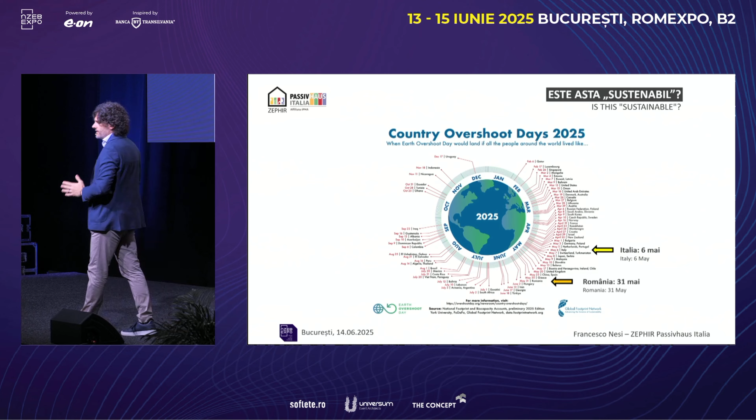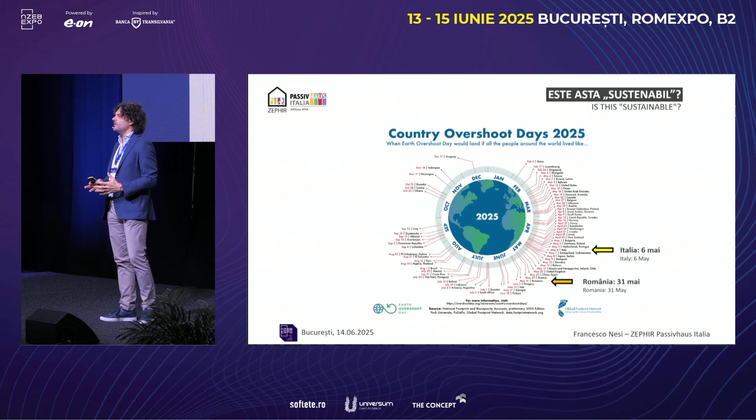As you can see here, in Italy, in May we already consume all the resources available for us. So from now, we are already consuming more than the resources available. Last year, 2024, the 20th of July was the country overshoot day for Romania. What's happened since last year to this year? As you can see, Romania is already at the 31st of May. So you were first at the 20th of July last year, and now you're progressively consuming more and more, approaching Italy even. We are still consuming too much, but that's why it's so important now to invest in energy efficiency.

As you can see, what we did in the world—we are based in Italy, as Dragos introduced before—but we've been working everywhere for 18 years. Here are some of the projects we've been following in several parts of the world, in very challenging climates, very warm, hot and humid, or very cold, like now in Montreal.

We also have been to Cameroon to explore the possibility of approaching with a low energy efficiency approach—not full Passivhaus because the market isn't ready yet, but using Passivhaus tools to approach the Cameroonian economy.

As well as in Bhutan, a very small country, the happiest in the world, because they measure their happiness not by GDP but by the gross national happiness index. It's something different from what we're used to, but they are also using the Passivhaus approach to increase the comfort of their lives and homes, which are very leaky indeed.

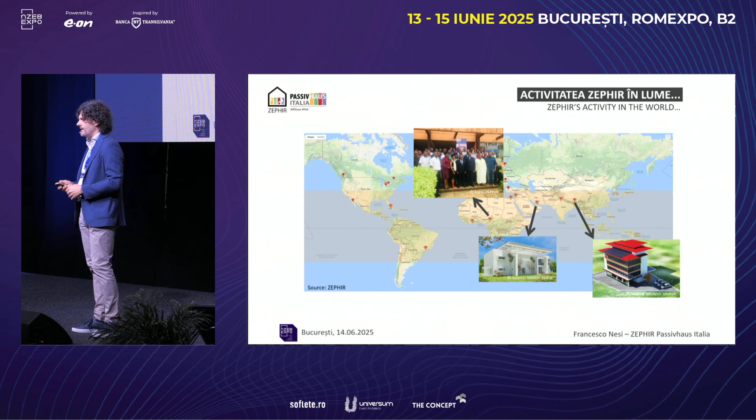In Dubai, we went to give consultancy for the very first Passivhaus in the desert, as well as in India, New Delhi—this was the National Railway Museum—and in Toronto, for the retrofit of a skyscraper according to the EnerPHit standard.

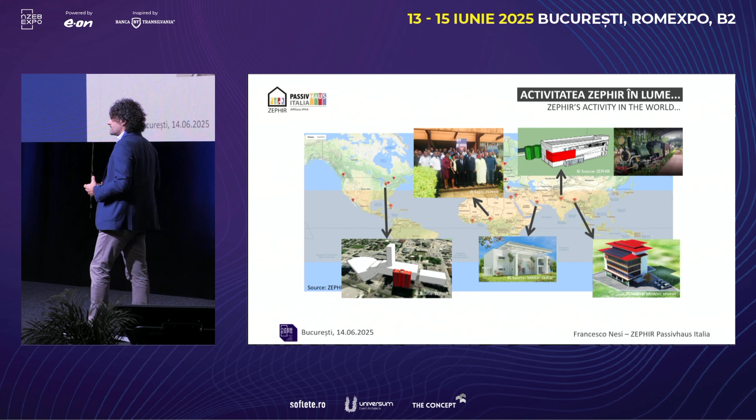So as you can see, Passivhaus adapts to every kind of climate, and we are happy to try to approach most countries, as well as in Italy. Since our foundation in 2011, Passivhaus has been rapidly growing, and we are trying to bring Passivhaus also toward the south.

It looks like people in the south don't realize how much they're paying for air conditioning and cooling, but only people who pay energy bills for heating come first. I don't understand why, but that's the reality. So people from the south are slower, they wait, but in the meantime they pay the bills.

As soon as they realize they're paying too much—our energy bills are so high, in Italy electricity costs range around 30 euro cents per kilowatt hour, which is pretty high—that's why people start realizing maybe we should invest in sustainability, insulation and airtightness and so on. The first question we're asked is: yes, but how much will I pay for it? Will I pay it back or not?

To answer this question in a professional way, we implemented an economic analysis into PHPP, the Passivhaus software. Every time we approach a new project, either for a new construction or a retrofit, we always start from a viability analysis, an economic feasibility analysis, to see how much more they are going to pay and whether these extra costs pay back through energy savings already in the first year.

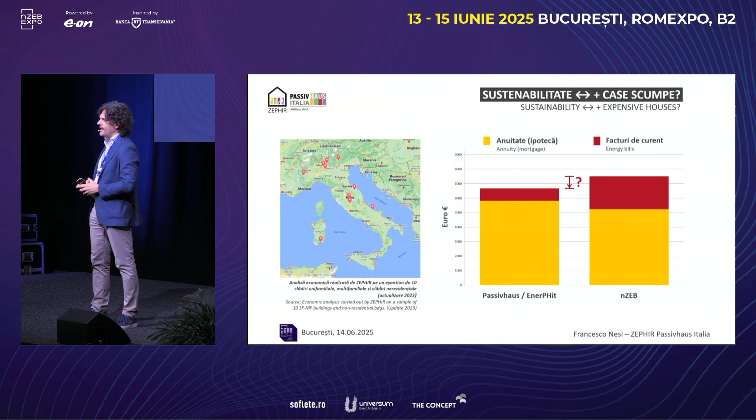We've carried out this research on some of our projects, and as you can see, Passivhaus is slightly more expensive than the alternative in investment cost, but this decreases the energy bills to such an extent that already in the first year, Passivhaus pays off.

And that's a very important message for the client, because if we do some economic analysis and the Passivhaus pays back, say, in 10 years, the client will never sign the contract, because he says maybe in 10 years I've sold the house, I've separated from my wife, whatever may happen. But if we use building physics—I'm a building physicist—connected to economics, and try to reach the point where already in the first year the Passivhaus pays off, the client will always sign the contract, because it pays back immediately. That's the important message.

So we always have this cost-effective, cost-optimal analysis in mind.

In Italy, in 2023, a couple of years ago, Banca d'Italia, the Italian bank, issued a study demonstrating that investing in real estate, in private investment, up to Class A level—we all know the EPC energy audits are often silly, claiming we're in Class A when indeed we are not even in Class C—but investing really in a very good, low-energy, efficient building like a Passivhaus and a real nZEB will really pay back. In the market, the property increases its value, even plus 25% more, which is very important, besides increasing comfort and having very low energy bills.

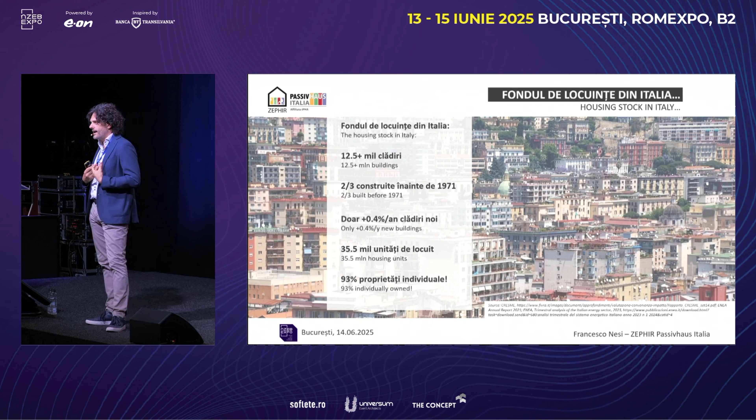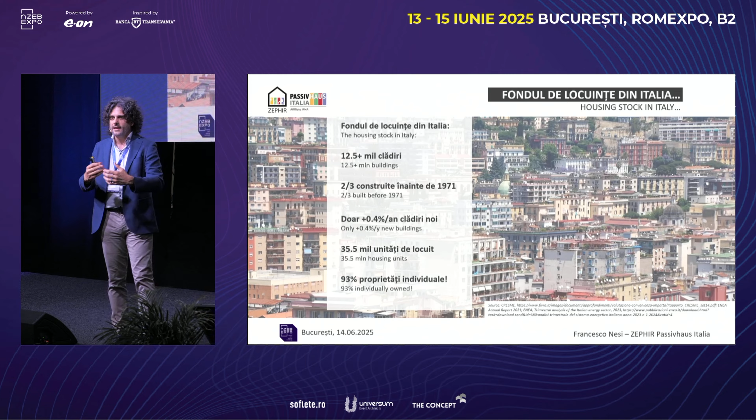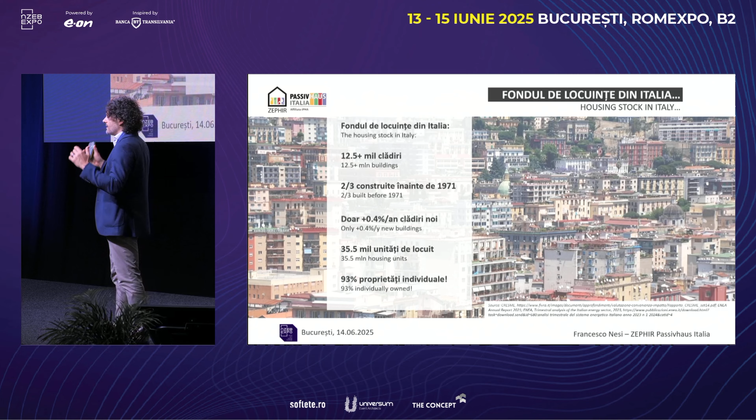As you can see, we have similar problems as you have, namely individual property. So I have a house, you have a house, he has a house, but it's not a house, it's an apartment inside a huge building block. And if a multifamily building needs all tenants to agree on the interventions and retrofits, this will never be possible, because of course they don't agree with each other on an overall, specific and consistent retrofit intervention.

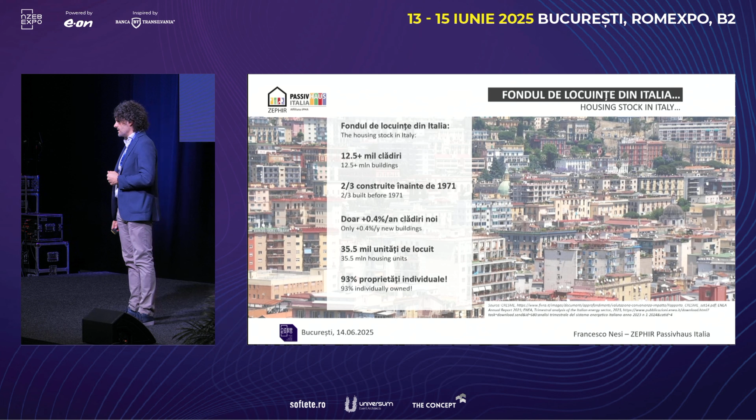That's the problem. We have even 35 million units to be retrofitted, 93% of them individually owned. And 75% of the EPC energy certificates issued since 2020 are not referred to the highest level.

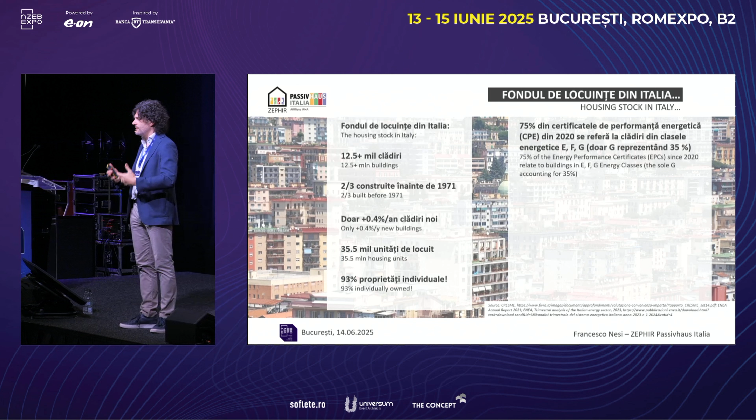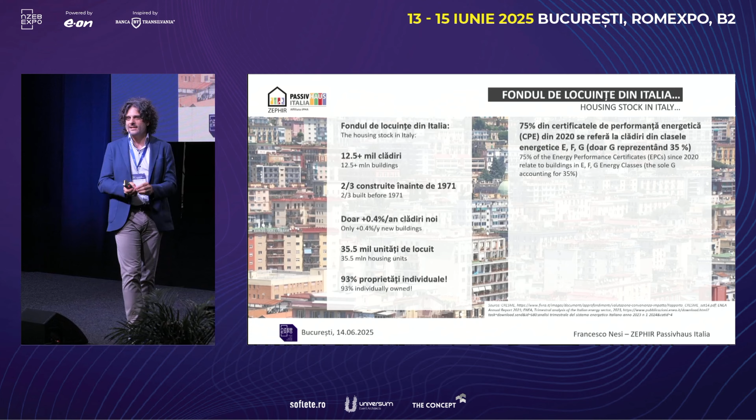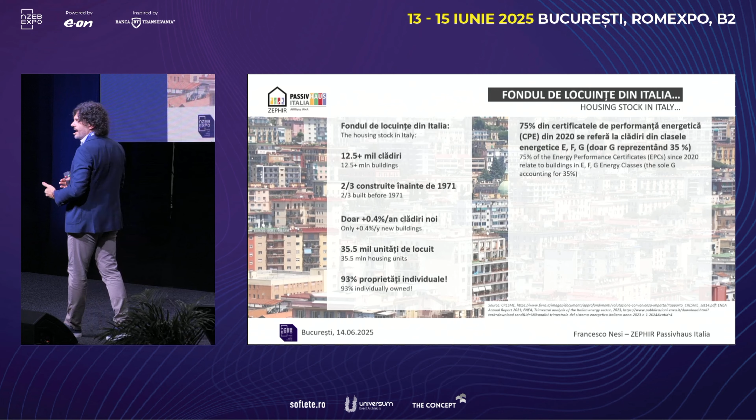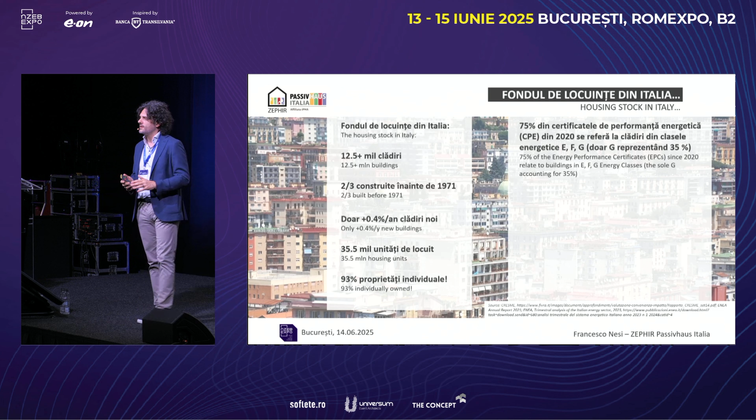Even though maybe you've heard about this, in Italy we had a very nice retrofit supporting scheme by the state after the pandemic called Super Bonus. They gave back 110% of the investment, so for free—everyone went there. But as you can see, they were not pushing or pursuing the A classes or something like this, the G, F, E, whatever, the lowest ever. So we trashed away a huge opportunity to retrofit our buildings to the best possible level, going instead for a suboptimal level.

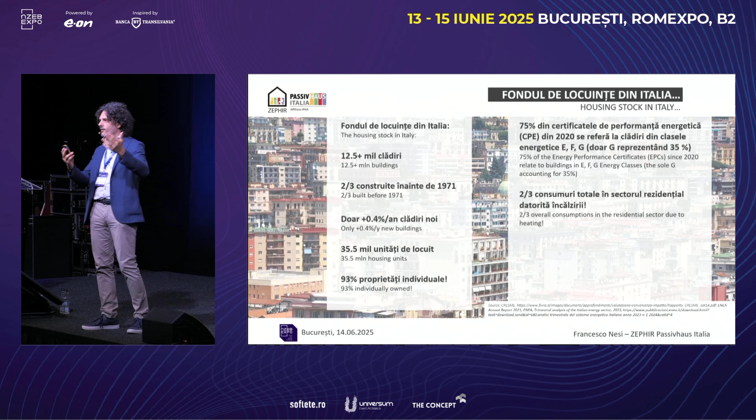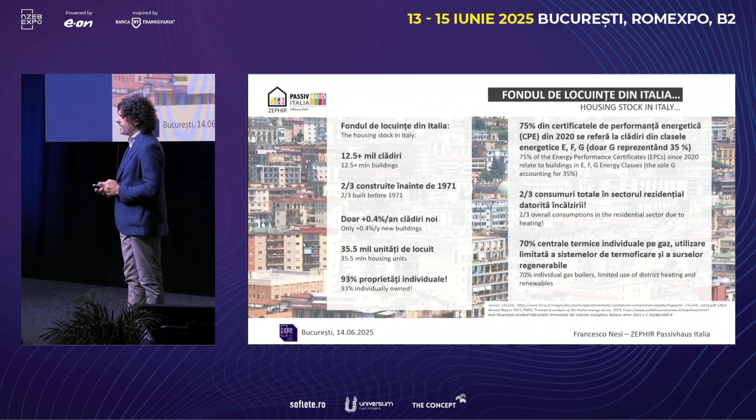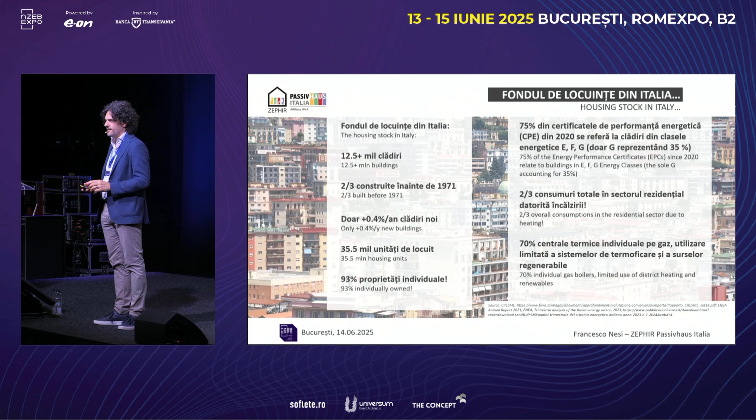Two-thirds of the energy consumption in Italy is due to heating, and we're in Italy, not sitting in Poland or Siberia, yet still two-thirds is trashed away through heating our buildings. 70% of our houses are heated through gas boiler, with very few, for instance, on district heating, teleriscaldamento, something like this.

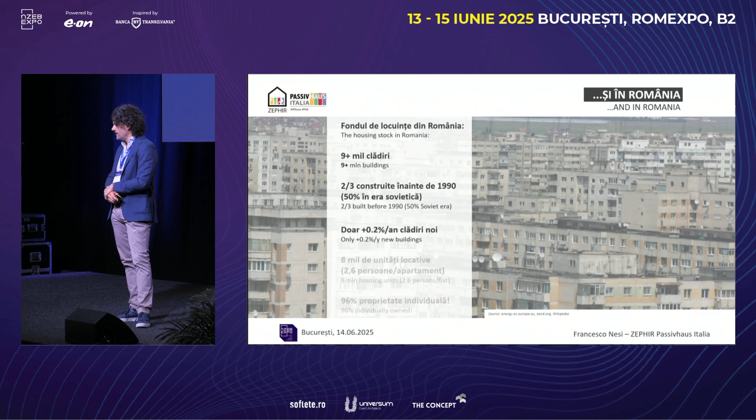Let's see the situation in Romania. You have 9 million buildings, more or less—this data is from the internet—two-thirds built before 1990, half of them built in the Soviet era, the blockery and so on. Only 0.2% per year are newly built, and the rest are, as you can see here, a very similar situation: 96% of the apartments are individually owned. So we should definitely invest in retrofits.

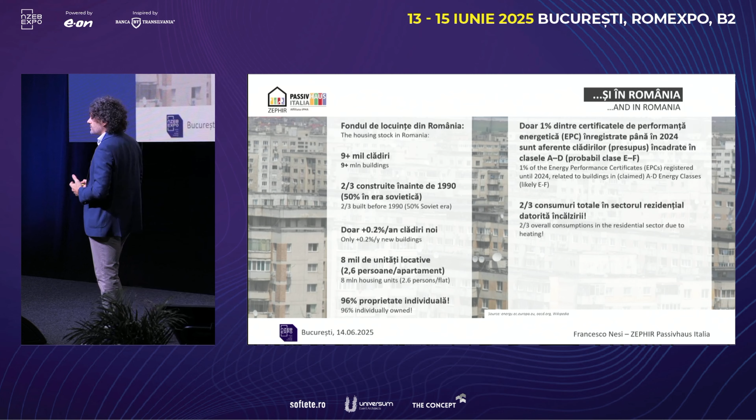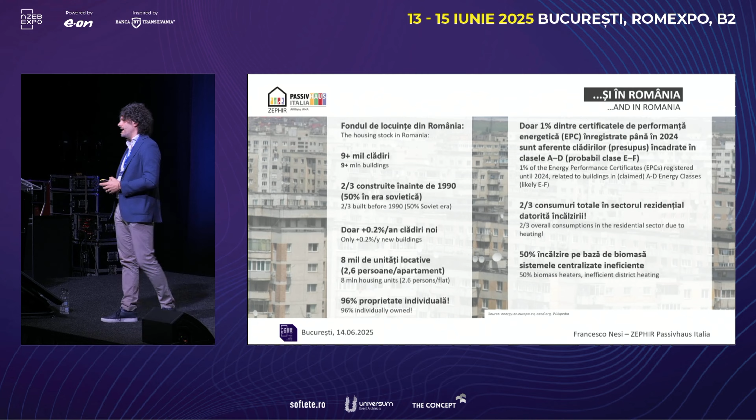How many EPC energy certificates have been registered in past years? Just 1%, claiming they are all in classes A to D, the maximum—but in fact maybe they are even E or F. So that's the situation, we should definitely do something better. Two-thirds of consumption here as well is due to heating, and 50% is basically biomass heaters, plus, especially in big cities, district heating, but a very inefficient one, losing a lot of energy.

So Passivhaus might be the answer to address this for new builds, and EnerPHit for renovations. EnerPHit can be of two kinds: EnerPHit standard, a normal renovation, or EnerPHit by components, where I work component by component—putting insulation on the walls, insulating ceilings, getting better windows, and so on. We can put all of them in order to increase comfort and reduce bills.

Then we have a step-by-step approach. This means I don't have the whole money for the overall investment, but I can plan a retrofit over the next years. Step-by-step I put some money into the first investment, like insulating a wall. I save money while increasing comfort, then invest in the next step—maybe replacing windows, increasing air tightness, and installing a ventilation system. Then stop for a while, and so on. That's also a very nice approach.

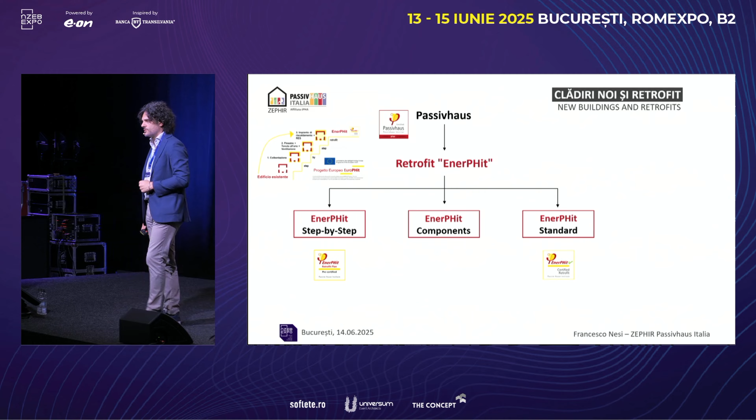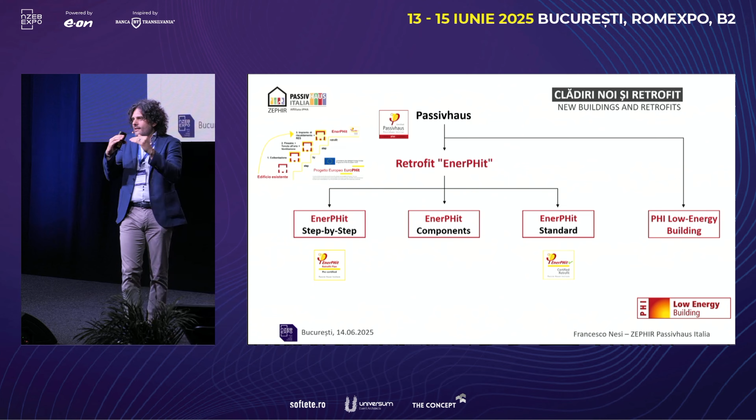If we don't manage to get all the way there, we could also use the PHI low energy building standard—a somewhat lower level, but still with the same level of comfort. This saves maybe not 8 to 10 times the heating demand compared to the building stock, but maybe 3 or 4 times, which is still a very good approach, also usable in a step-by-step way.

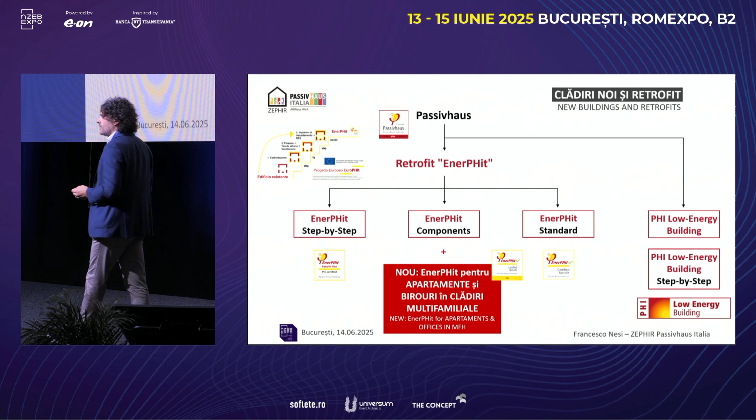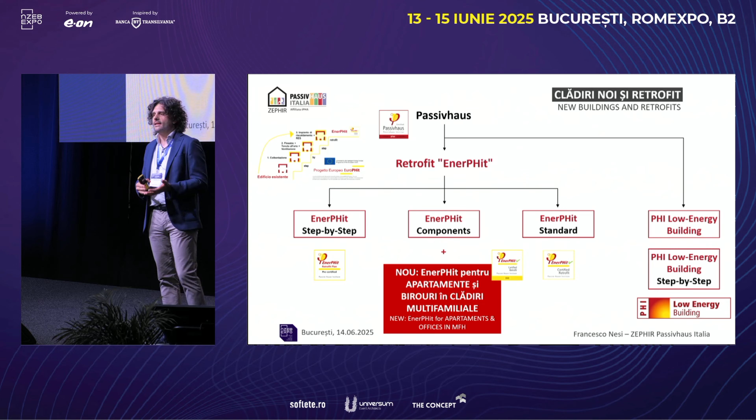Last year we presented the very first certification in the world for the retrofit of apartments, developed very closely with PHI, which we call EnerPHit Unit. Unit stands for a dwelling unit inside a multifamily building, which could be residential or an office, for instance. We did this for the very first building apartment, in Bergamo.

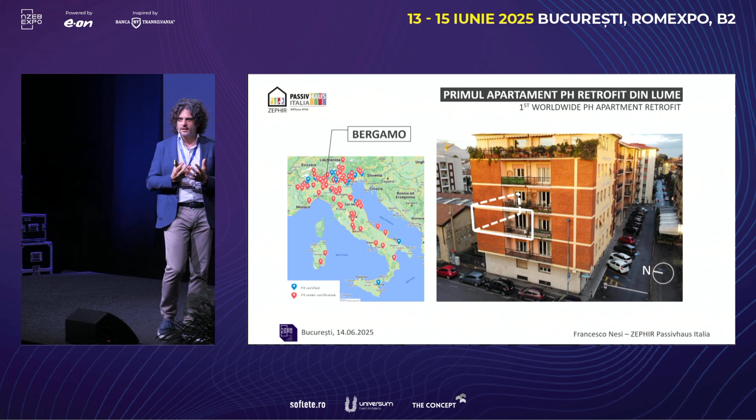It's north-facing, not ideal, but we worked with what we had. We had problems with external scaffolding, so we had to do interior insulation instead—very tricky, but we managed it.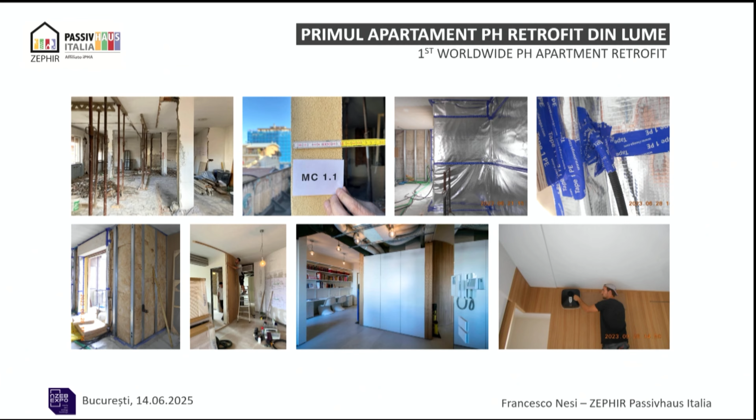Construction was about to begin. I won't go too much into detail—you can see last year's YouTube video where I presented this properly—but you can recognize it. We had a double wall with bricks and air in the intermediate layer, so we just removed the internal wall layer, creating space for insulation. Of course the concrete pillars remain, and we had to wrap them with insulation to try to solve the thermal bridges there. So it can be doable.

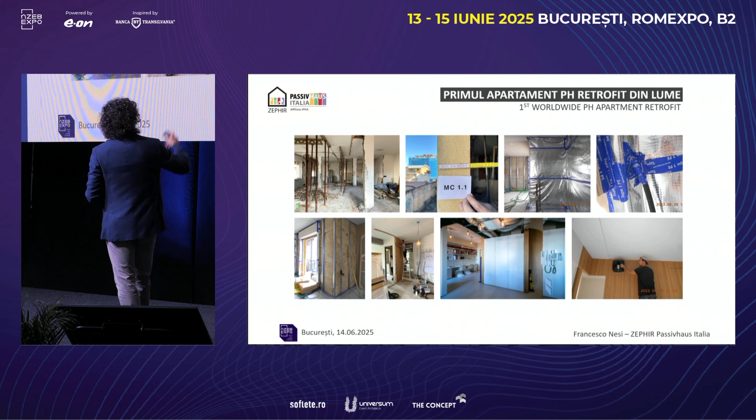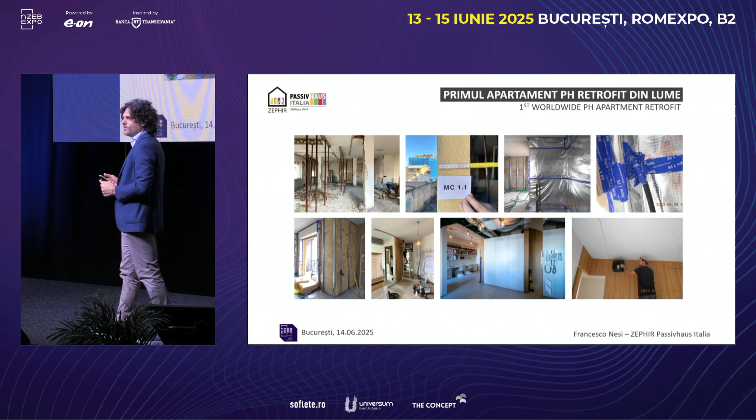Pay attention that the tradespersons involved in this renovation were not skilled, so we had to train them on site—how to put a good insulation layer, a good airtight layer, everything sealed properly, and so on, in order to reach the stringent requirements for the EnerPHit Unit certification.

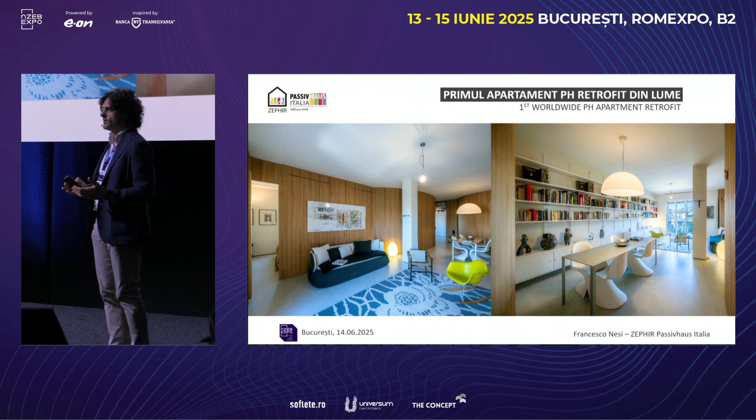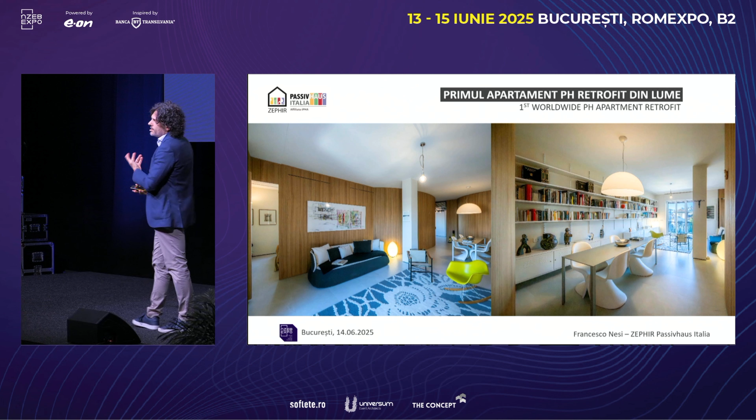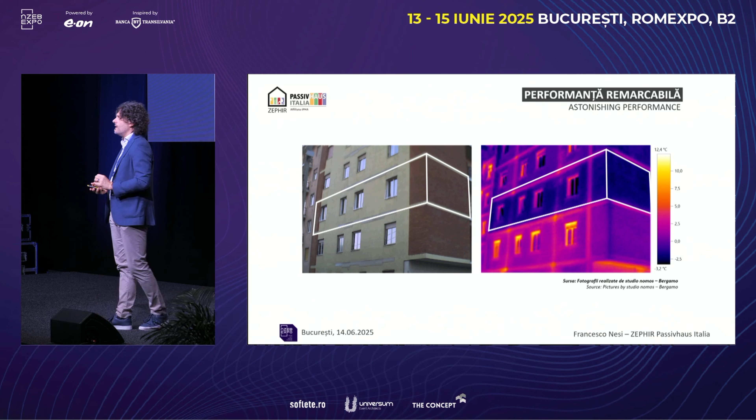Very happy about this—this is the final result, also very nice looking from the architectural point of view. Some people complain that Passivhaus only produces ugly buildings and ugly renovations, but as you can see, the owner, who is an architect, did a very good job here. This can also be seen from outside through thermographic imaging, where you can really notice the difference between the adjacent dwelling units that haven't been retrofitted.

We are also monitoring everything—energy, temperature, humidity, and also energy bills, which still correspond to less than 2 euros a day, sort of a cappuccino cup a day in Italy. That's more or less what we pay for a Passivhaus renovation. In terms of investment costs, one could guess this would have cost a lot, but that's not true—the investment costs have been kept comparable to a normal retrofit, which in Italy is around 1600 to 1700 euros per square meter. So the same amount, but the guy got a Passivhaus apartment.

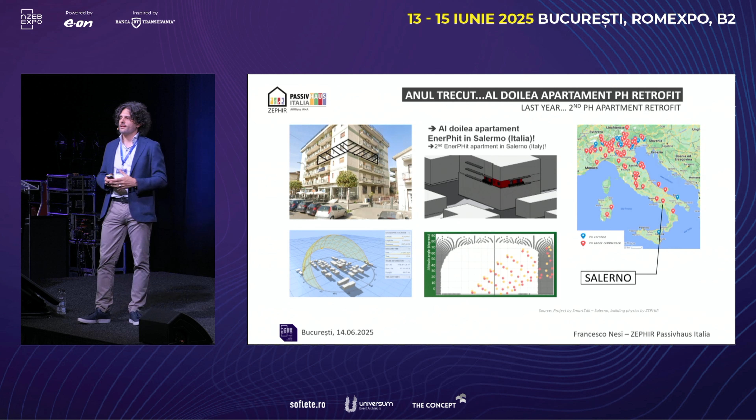Now we come to the second Passivhaus apartment, this time located in Salerno, in the southern part of Italy. You can really see that the interventions are pretty similar, just with different thicknesses, or different thermal resistance. So it's even more easily achievable there.

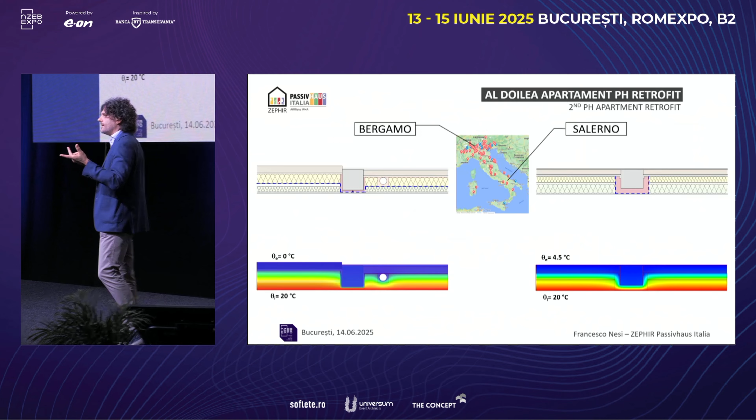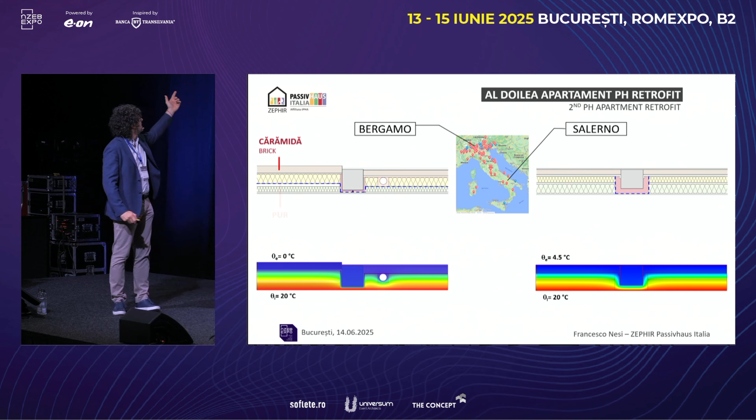This is just a comparison between what we did in Bergamo and what we're doing in Salerno. Here we have external brick, and we used polyurethane from the inside to minimize the space while achieving very high thermal resistance, plus a mineral wool for the electric pipes and ducts and everything like that.

As you can see, in correspondence to the concrete pillar, we had to use VIP panels, vacuum insulation panels, which with a thickness of 1 centimeter is equivalent to about 18 centimeters of EPS. Since we're in a very cold climate like Bergamo, we had to invest more to solve the thermal bridges. We also had to use a vapor barrier, because we insulated that much on the inside, and all the tradespersons had to be trained how to do this on site.

Let's analyze Salerno. We have a very similar building assembly here: bricks, double wall with an air layer, calcium silicate, and also AAC - autoclaved aerated concrete, gas beton. So we're using Ytong and Multipor, very common materials used in Italy nowadays in the south. They're pretty cheap, and therefore you can also achieve the Passivhaus level.

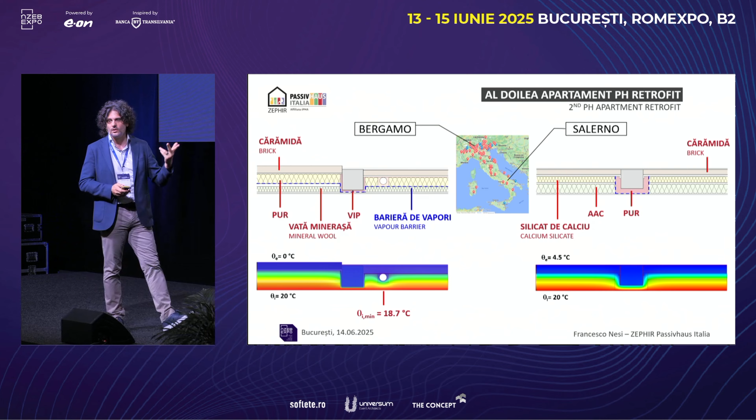Around the pillars we used polyurethane, because we are in a warmer climate. We don't need to be so stringent like in Bergamo, but as you can see here, the interior temperatures we achieve are pretty similar.

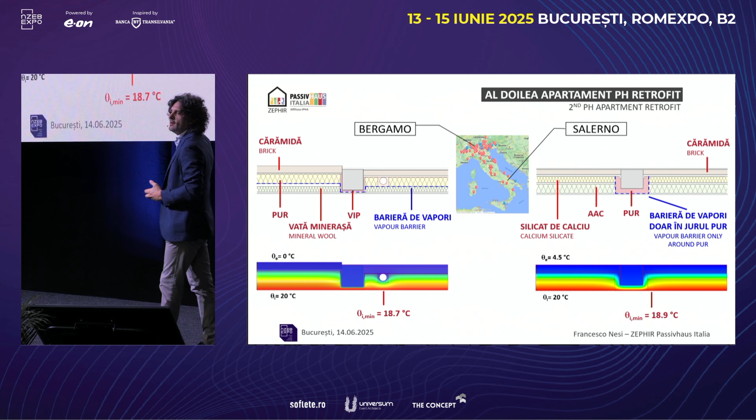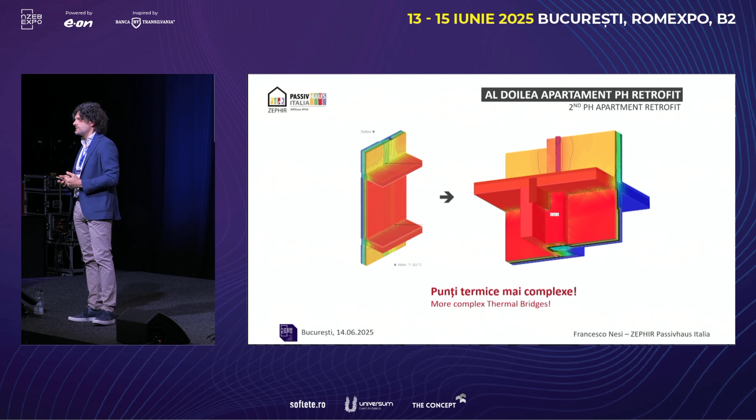From time to time, we also had to address even more complex thermal bridges, through 3D calculations which are totally non-trivial. But everything summed up, again in this case, the investment costs are really comparable to a normal retrofit.

Now we are at the construction stage, so we started the demolition. Here you see this double wall, where we removed the bricks from the inside, in order to use this space for putting the insulation from the interior.

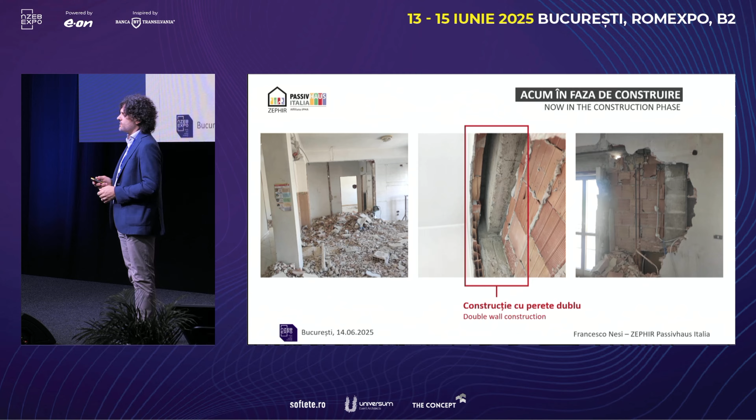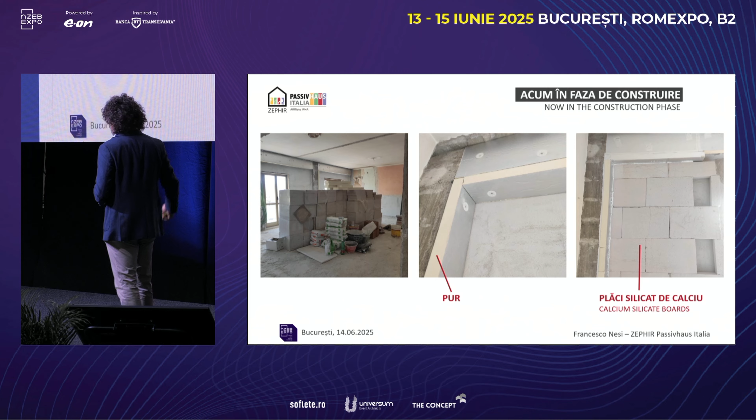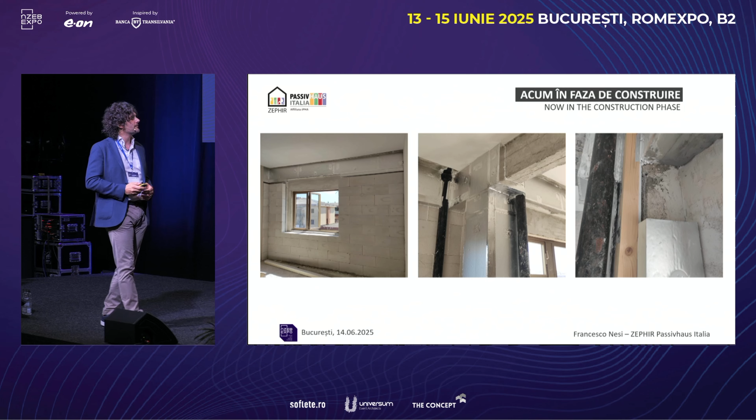And then also polyurethane around the pillars, and Multipor calcium silicate boards used like bricks - insulated bricks - for the insulation layer, connected to the wall, and then AAC, autoclaved aerated concrete, also as an internal finishing, and then we plaster everything.

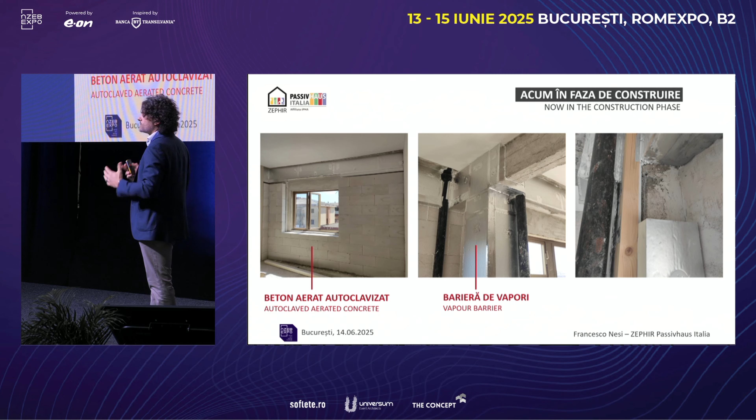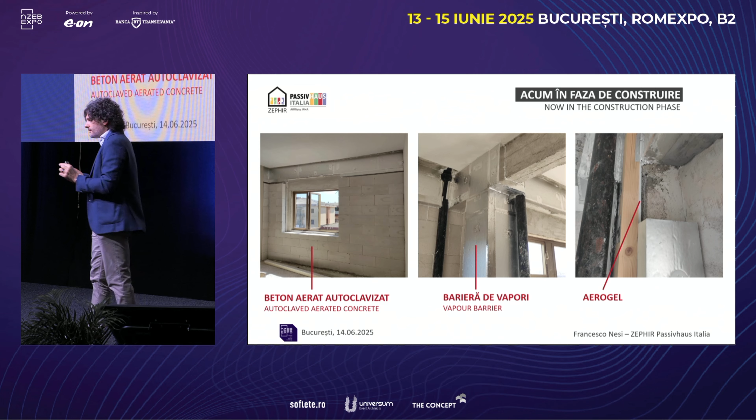Around the pillars, we used some vapor barrier, because there we really needed it according to our calculations. In some points, we also used aerogel around some concrete pillars, but this is the maximum we did in this very warm situation.

So I can tell you more next year about how it ends up.

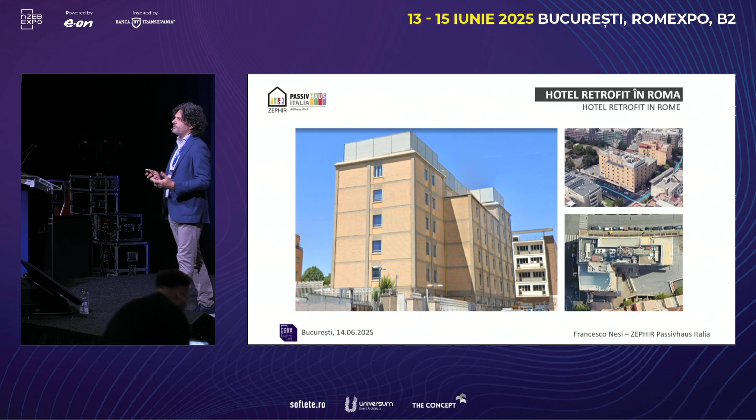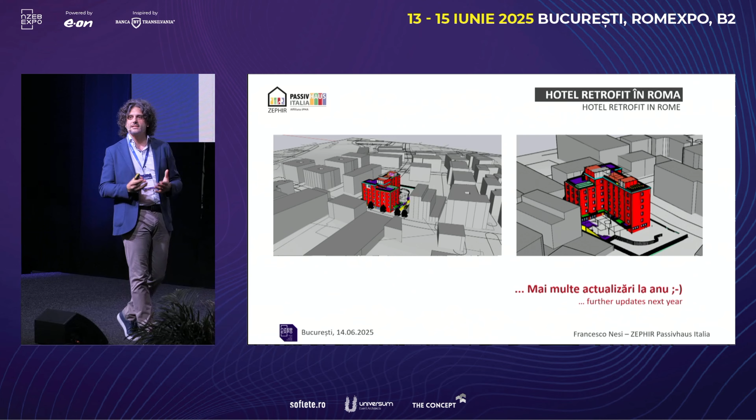We already built a new hotel at Lake Garda in the northern part of Italy. Now we are in Rome with non-trained craftspersons, which makes things very non-trivial. You can believe me how difficult it is to be listened to by these guys when you speak about airtightness and thermal bridges - you punch everything, you pass everything through, and people don't really realize that we need an integrated design between all the professionals. But I hope we will manage it.

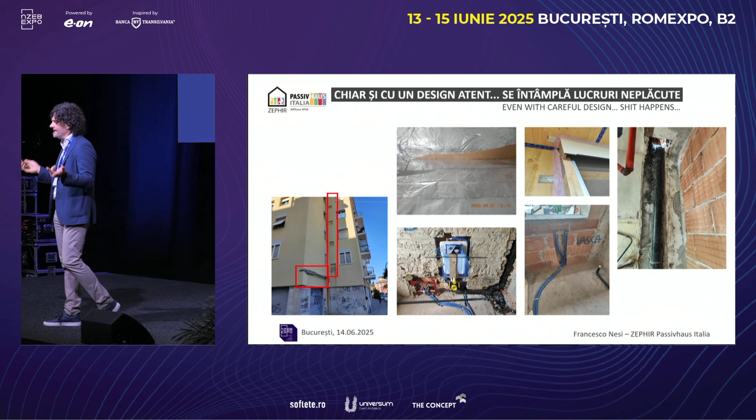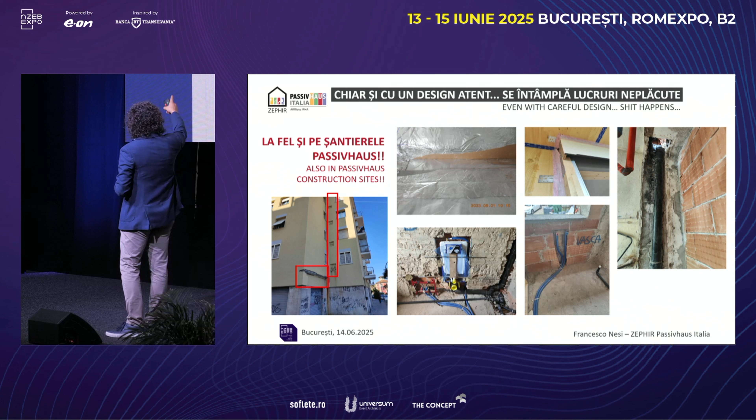Of course, mistakes happen everywhere, always, even in Passivhaus buildings. They just cut the exterior thermal insulation to let the building services pass through, or didn't insulate them at all. Or they really cracked and ripped the whole airtight layer just because they used improper sealing, or didn't seal before fast plastering ahead of installing the building services.

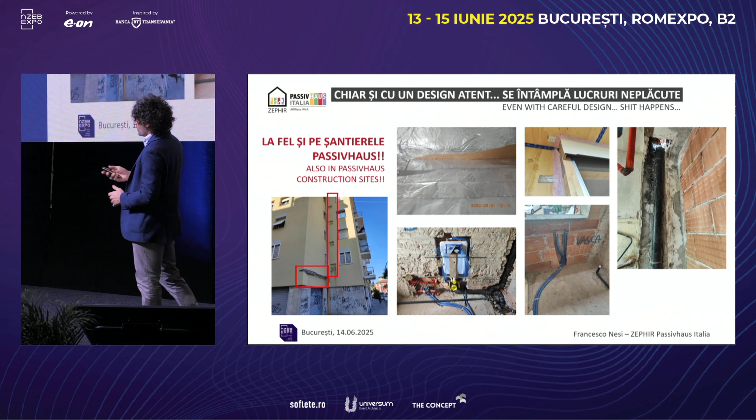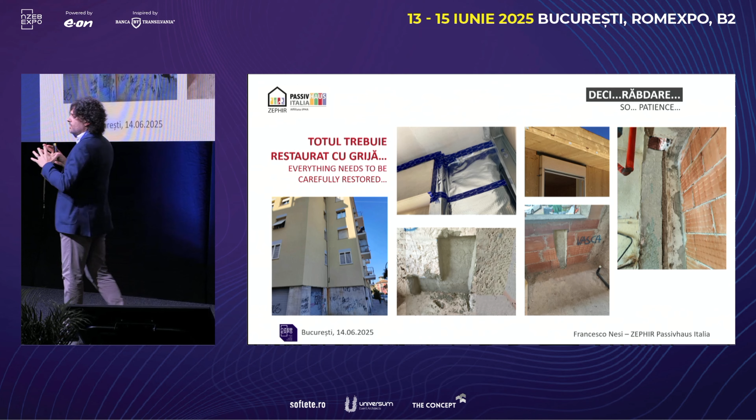We always warned about that, but nevertheless, this is the situation, and of course, with patience, we had to redo everything from scratch. So this was before, and this is after - again, before and after. We had to remove everything, plaster everything, reinstall everything. There was nothing else to do, because otherwise it would have cost so much, while also creating issues for mold growth and so on.

So why properly retrofit? This also applies to new builds. First of all, for the hygienic criterion - hygiene means no mold, no condensation. We can address it; I don't care about reaching Passivhaus, I must tell you, but I do care about avoiding suffering for people, avoiding diseases or health problems. So at first glance, we have to achieve the hygienic criterion. Then comfort - comfort is also important, which has nothing to do with the hygienic criterion.

Comfort means that I can stay as close as I like to a window, not being discomforted by interior surface temperatures which are so low that after a certain time I feel uncomfortable. This is also very important for the people.

Then we speak about sustainability and, of course, energy and economic approach. After we address the first two points, the rest comes for free, and it's very easy to achieve Passivhaus or EnerPHit. Of course, we can support for it, and Passivhaus is really the key to approach this kind of retrofit, not only new builds.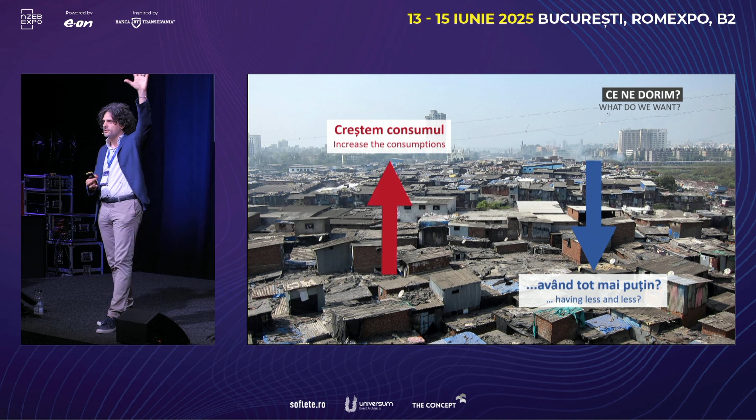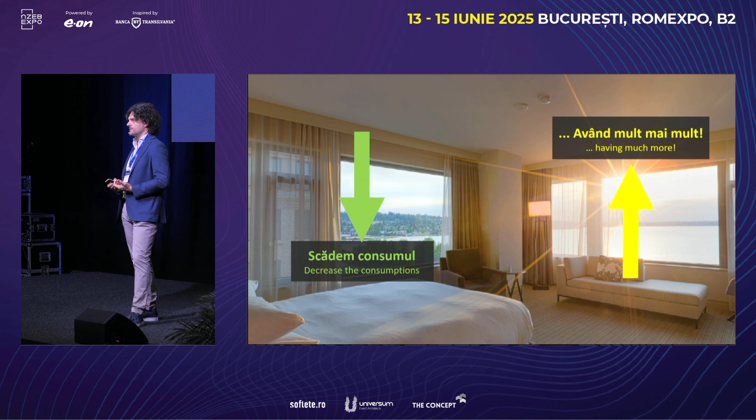So what do we want? Do we want to increase consumption, having some with less and less, like it happens in India and so on, where part of the population goes up and the other has less and less? Or, because components are there, can we choose to have the maximum decrease in consumption? This is just sustainability. Thank you for your attention, mulțumesc.